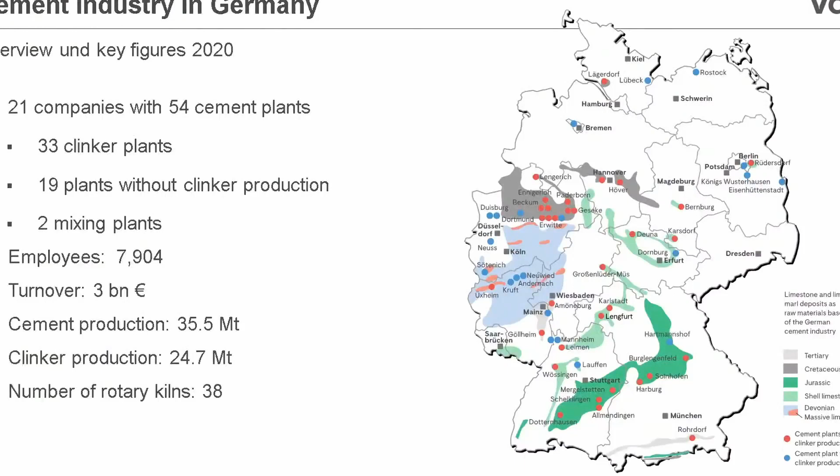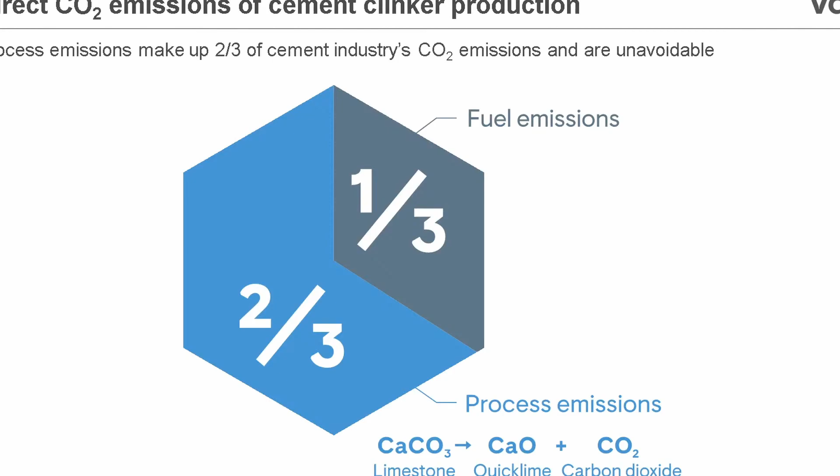When it comes to greenhouse gas emissions in the cement industry, we mainly talk about CO2, because fortunately we more or less do not have other emissions. What's very important, and this is the main difference compared to the power sector, is that the cement industry has about two-thirds of CO2 emissions coming from the decarbonation of the raw materials, the limestone, and only one-third coming from the combustion of fuels. That means, unlike the power sector which can switch to renewable energy, this is not fully possible for the cement industry - the limitation is this one-third which could potentially be replaced.

And still there will remain the two-thirds of CO2 emissions coming from clinker production.

A short look into the history: we see here the development of total CO2 emissions and specific CO2 emissions per ton of cement for the last 30 years, starting more or less with the German reunification. As you can see, we had a drop of about 23 to 24 percent for both values.

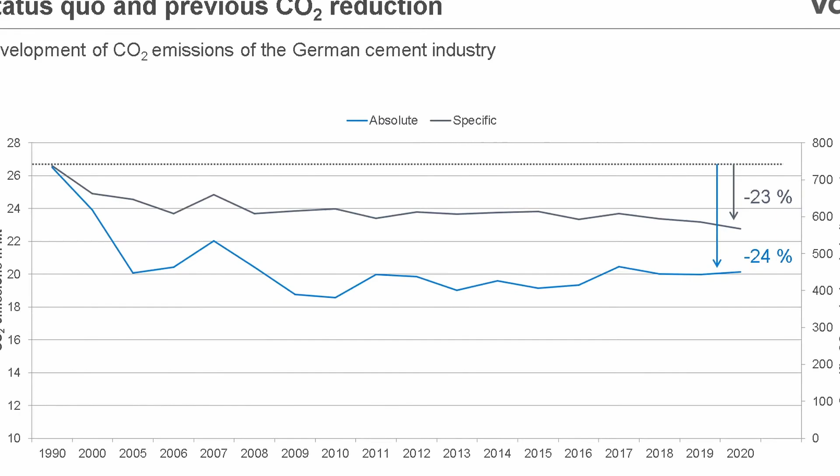What you can see as well is that we had a quite steep decline in the first years after the German reunification, where we had a lot of investment in the new countries, as we call them. After that, there was a more or less stable development with some fluctuation. But if you look at the upper line, the specific line, you can see that during the last 3 to 4 years we again had a small decline.

I think it is good to say that this will also be due to the CO2 prices which we have in the European Union with the EU ETS. We've had it already for many years, but the CO2 price increased over the last 5 years. Today we are above 60 euros per ton of CO2, which is really a significant value. We will come back later to some prices or costs of measures, and then we will see that with the 60 euros per ton, it starts becoming more and more worth it to invest in measures.

Why did we do this? The background of climate change and European policy I don't have to mention here, you are well aware of this. But as the German cement industry, we thought 2 years ago that we really had to investigate how it will be possible to achieve these targets of the European Union for the cement sector. There was already a roadmap for the European cement industry, and we wanted to break this down to the German sector, also in much more technical detail, as we are used to doing at VDZ.

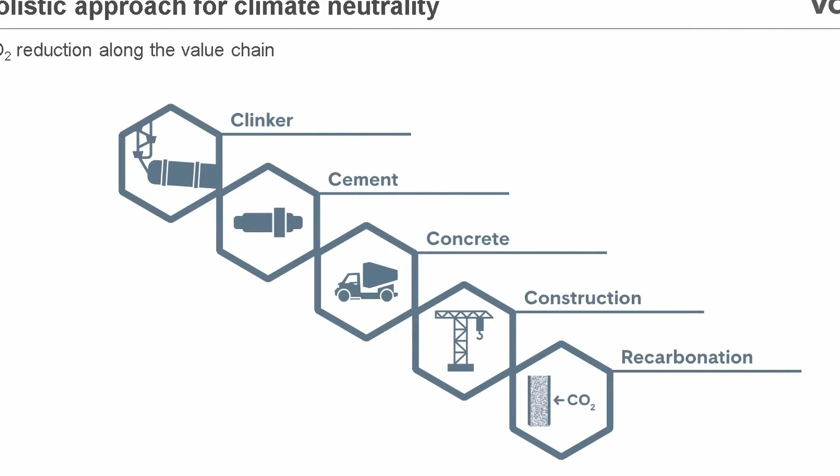How did we do this? We defined two scenarios, one which we called the ambitious reference scenario. So it's not only business as usual, but it's really looking at technologies which are available today already, let's say in the lab or pilot scale, and implementing this in the sectors. And then a second scenario, the green field here, which is the climate neutrality scenario. Here we took everything into account that we think could become possible or technically achievable in the next 30 years.

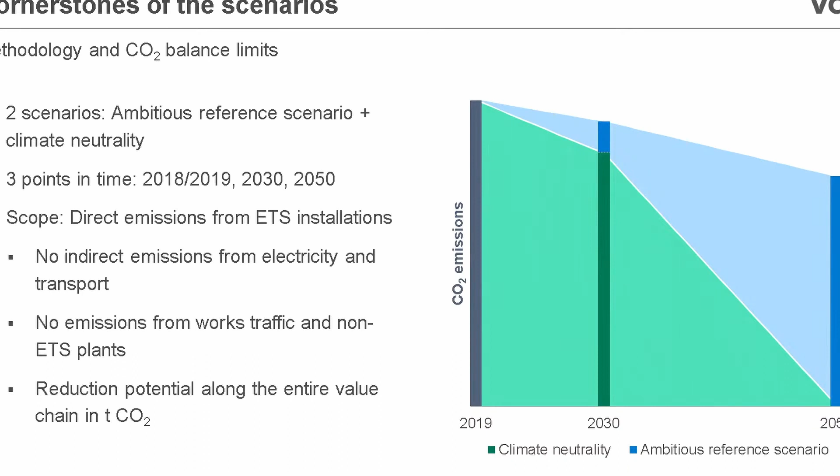We defined the scope on the direct emissions. These are well known and yearly reported by companies within the EU ETS, so these are data which are publicly available. We did not include, for example, the CO2 emissions from mobile sources, which are really minor in the cement industry, and we did not include indirect emissions from power consumption, because we assumed as a boundary condition that power generation in Germany will be more or less renewable by 2050.

So no greenhouse gas emissions anymore from power generation. Then the next question was - we are technical people mainly at VDZ, so of course we start looking at our clinker kilns and cement mills. But very soon we came to the conclusion that we have to start at the back end, which is construction, and the question: how much concrete will we need in 2050 in Germany, and which raw materials will be available at that time?

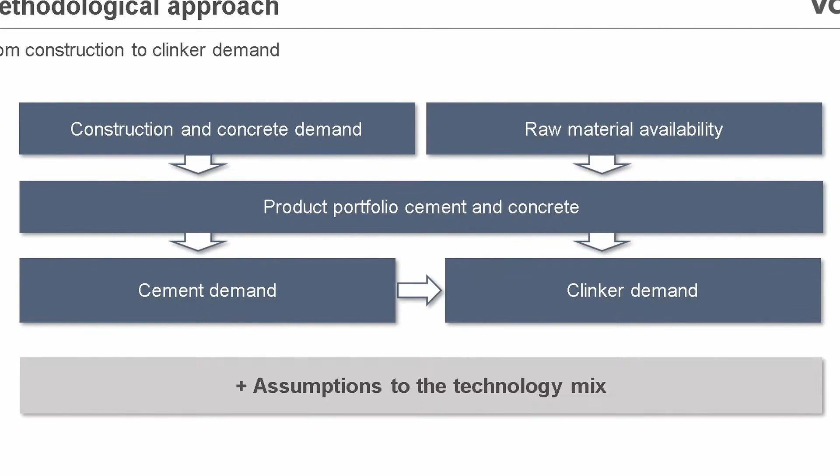Starting to look at the materials which we use today, there will be big changes - I'll come back to this. For example, fly ash will disappear with stepping out of coal firing and power generation in Germany until 2038, and also slag, like we know it today from blast furnaces from the steel industry, will more or less disappear, or at least be significantly reduced, which is bad for our clinker-cement ratio, and we have to look at which materials can then be used instead of those.

So coming then from construction and concrete demand, we went back to cement demand - how much cement will be needed, how much concrete will be needed - and then we went back to how much clinker will be needed in order to achieve these objectives. And based on this, we took quite many assumptions.

With regard to thermal efficiency, we calculated a couple of years ago in a study that we can improve thermal efficiency by 13%. There's a lot of technical calculation behind it, but please take it as given here. We think this has already been done in the ambitious reference scenario, so it's the same in the climate neutrality scenario, because this is everything that can be done regarding thermal efficiency.

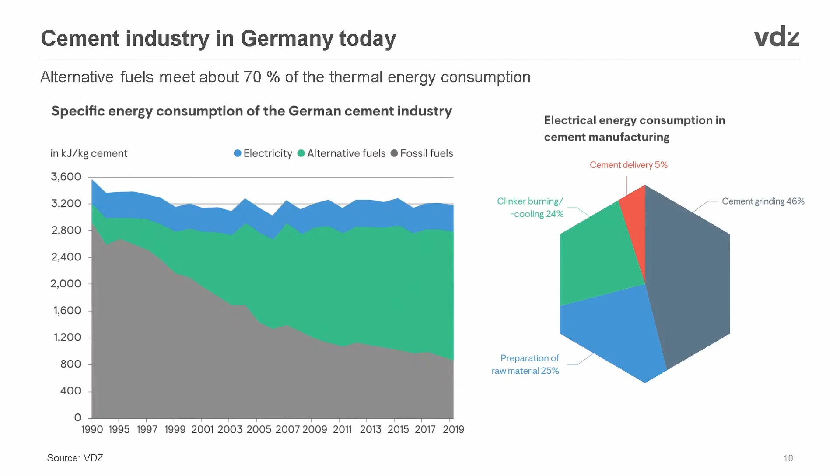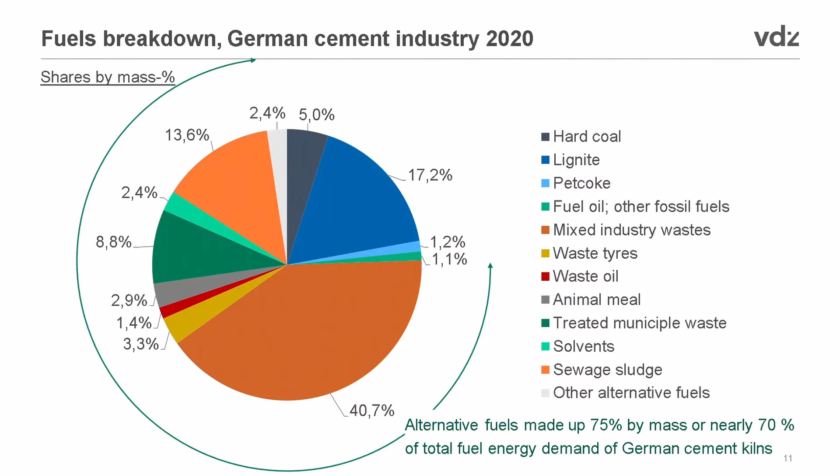This is the RDF, which you also use in the Lukavac cement plant, as I learned yesterday. But there's also, for example, sewage sludge, which takes a big share at least by mass. We still use alternative waste like tires, a little waste oil, a little animal meal, and also pre-treated municipal waste, which is also a kind of RDF but with a slightly different composition. So 70% is where we are today.

Going back to the measures: we think it will be possible in the ambitious reference scenario to go up to 85%, and in the climate neutrality scenario even up to 90%. I'd like to mention that we already have cement kilns running at more than 90% as a yearly average, so we know this is possible.

The main challenge is the availability of these materials. We'll come back to alternative fuels and waste fuels later, but the availability will depend strongly on policies regarding resource sufficiency in the European Union. For example, will plastic waste be available in the future? To be honest, we don't know, and it will certainly be different.

Nevertheless, we are convinced there will still be sufficient waste available which can be treated into fuels that can be used in the cement industry. We have assumed this will contain about 35% biomass, which is more or less the same value we have today in the alternative fuels used in Germany.

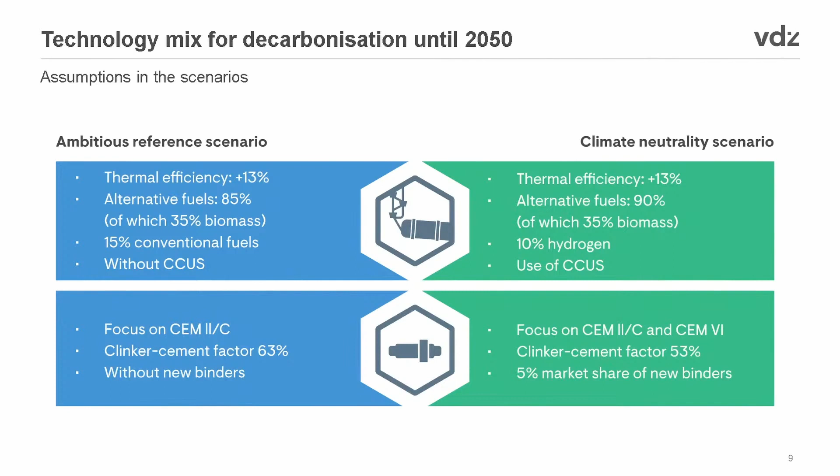Hydrogen is very sexy at the moment, everybody is talking about hydrogen. But I can tell you, last week we participated in a big test in a cement plant in the UK, where we replaced about 40% of the total fuel energy consumption of the kiln system in the sintering zone with hydrogen. There was no negative effect — it was like going to natural gas. We ourselves were really surprised. That was the first big industrial test as far as we know, and it was very positive.

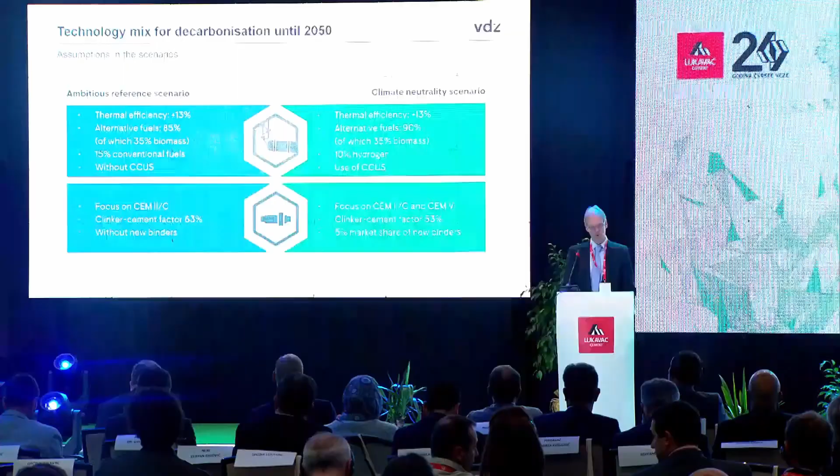Regarding CCUS, carbon capture, storage and use, we assumed that in the reference scenario we will not use it, but in the climate neutrality scenario we will have to use it. On the cement level we have different scenarios, which I will show in the next slide.

We'll focus on CEM II/C cements in the reference scenario, achieving a clinker cement factor of 63%, while in the climate neutrality scenario we will focus also on CEM II/C cements but also on the new CEM VI cements, in order to come down to a clinker factor of 53%. In the climate neutrality scenario we also assume 5% market share of new binders, which have been developed for many years but are not yet on the market today.

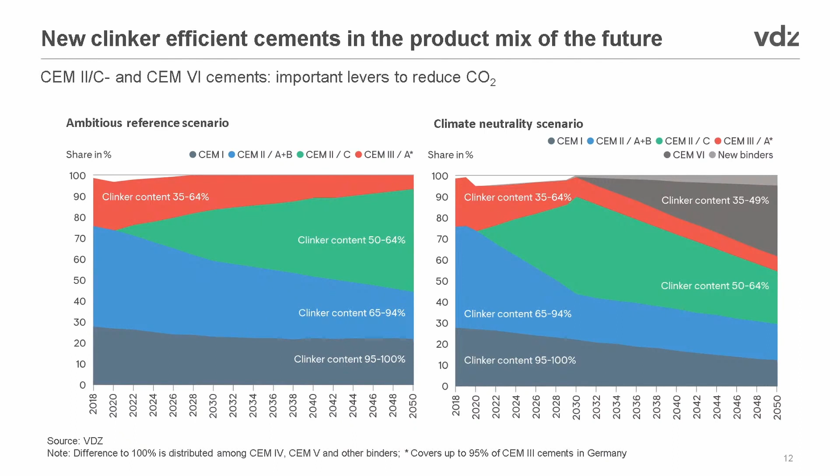So here we see how it will develop with the clinker factor. On the left-hand side, the reference scenario; on the right-hand side, the neutrality scenario. Let me focus on the neutrality scenario. You can see the different cements with different clinker content. The grayish one is 35 to 49%, and the bottom dark blue is CEM I, so 95 to 100% clinker content. As you can see, the grayish part, the CEM VI cements, as well as the CEM II/C cements, the green part, will have to increase significantly in order to achieve this clinker factor of 53%.

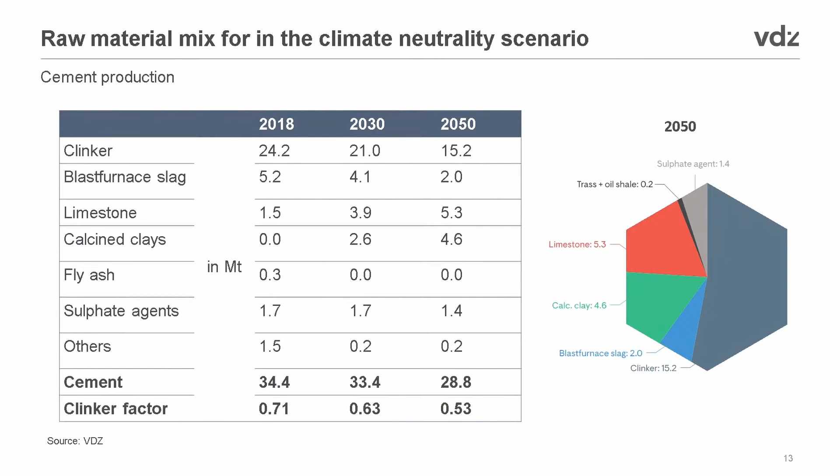What does that mean for the raw material mix for cement production in Germany? In 2018, we had 24 million tons of clinker, and this would go down, if this assumption comes true, to about 15 million tons. Blast furnace slag will come down from 5 to 2 million tons - even this is a big challenge. Limestone will increase significantly because these new cements will require more limestone. Calcined clays will come into the market by nearly 4.5 million tons, really significant, but there's also a big move at the moment. Fly ash, as used in cement, will disappear - fly ash in Germany goes mainly into concrete, but there too it will disappear.

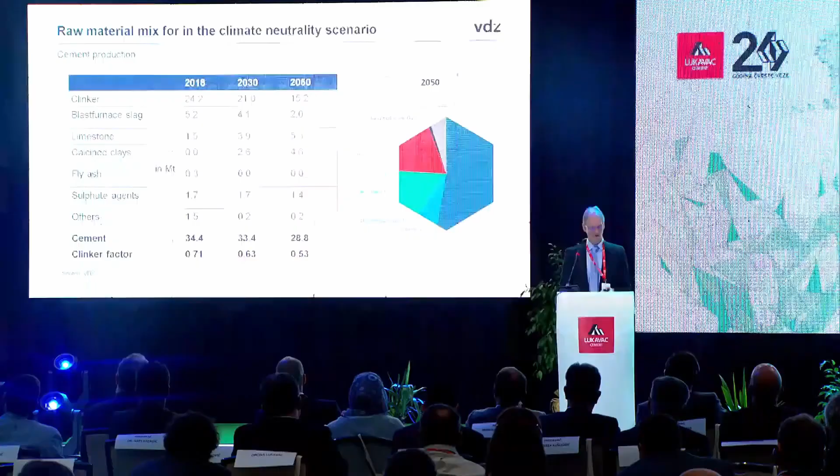We need the sulfates, of course. So you see the clinker factor once again. Already this, to meet this raw material scenario, is a huge challenge.

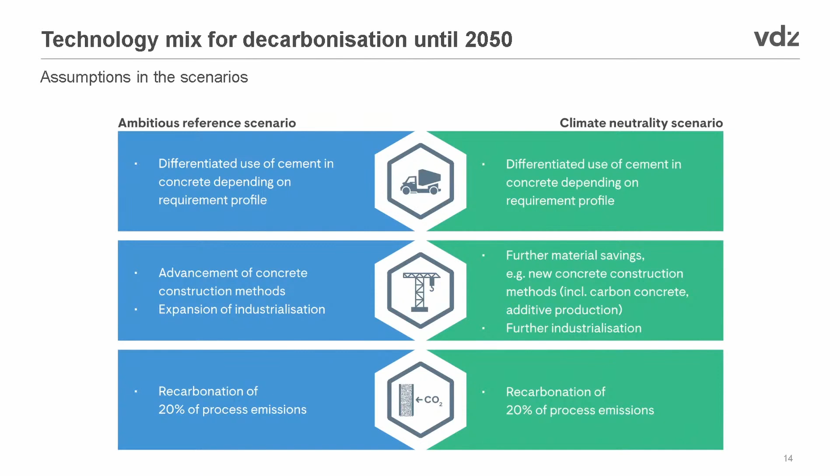I come to the technology mix and the assumptions for concrete and construction. First of all, we think that in both scenarios we will assume a differentiated use of cement in concrete depending on the requirement profile, which will be a big challenge for the construction site itself. We think we will have advancements of concrete construction methods and an expansion of industrialization in the reference scenario, and especially in the climate neutrality scenario this will be extended even further. And we have the recarbonation with 20%.

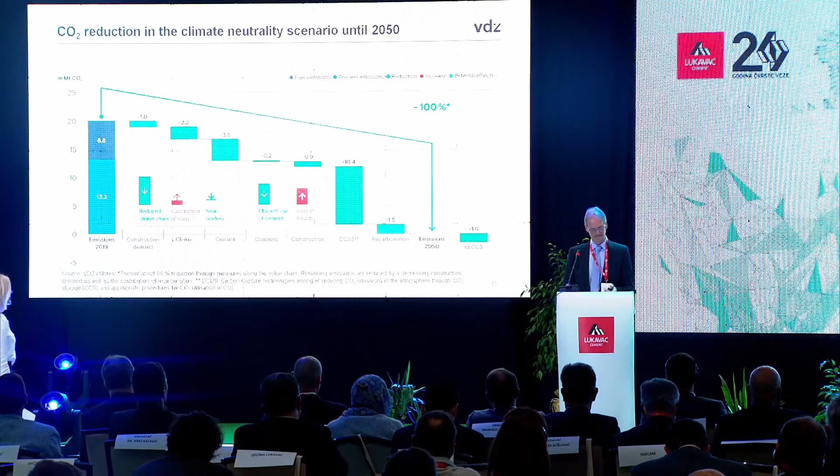So this is the final result. On the left-hand side, you see about 20 million tons, which we had in 2019, of CO2, and you see the different levers which have to bring their share. What remains is the big bar with 10 million tons, which will be reduced by carbon capture.

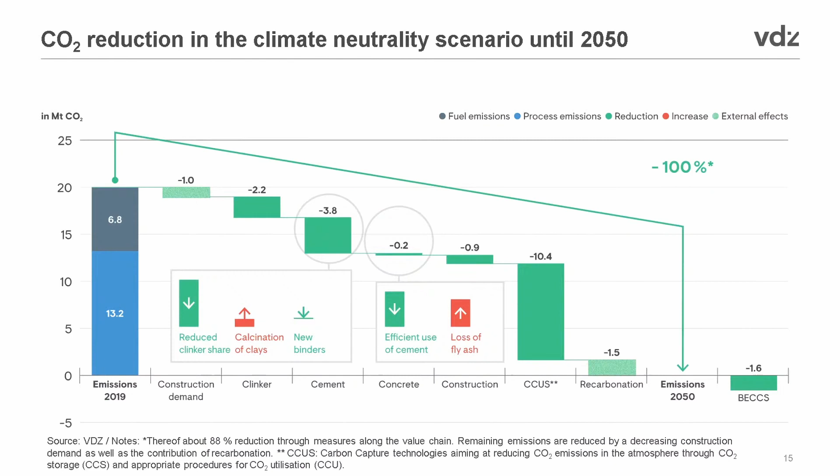Only one slide about carbon capture regarding costs. I can tell you that at the moment we have in Germany the planning phase for 2 carbon capture projects - 2 oxyfuel kilns are being planned to be built in Germany at least. This is also publicly well known.

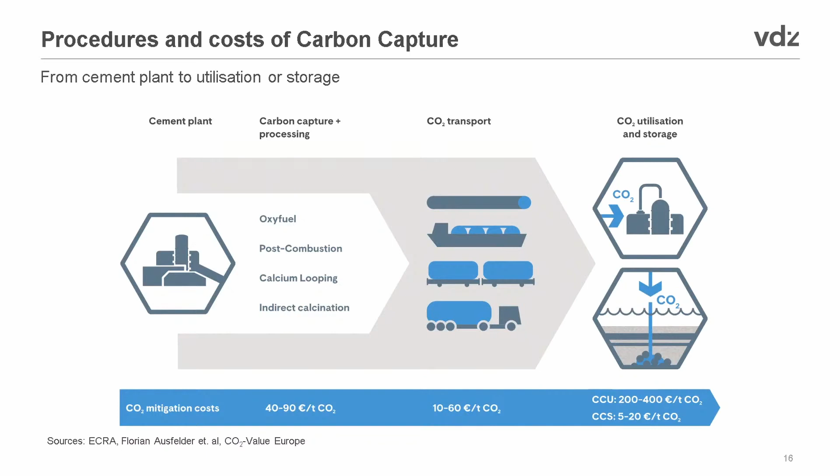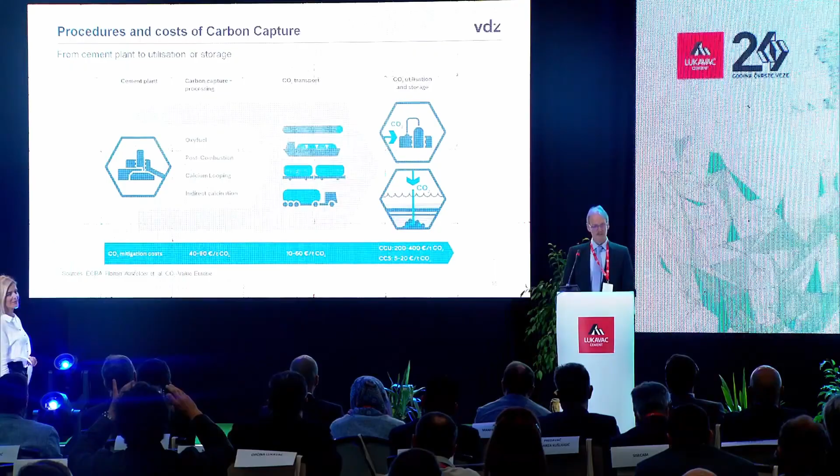We have the different technologies, but when it comes to costs, it's a bit small here, but you can see that capture costs are today between 40 and 90 euros per ton of CO2. Then we have the transport, which is also a huge challenge to set up a CO2 infrastructure, and then the storage costs or utilization costs, which bring the cost up to beyond 100 euros per ton of CO2. And when we talked in the beginning about EU ETS and the 60 euros which we have today, you see that we are not there to make this really economically viable.

And last but not least, we will need societal acceptance for this industrial transformation. I would like to end with a word - we always say yes, it has to be done, but we have to do this. Thank you very much.